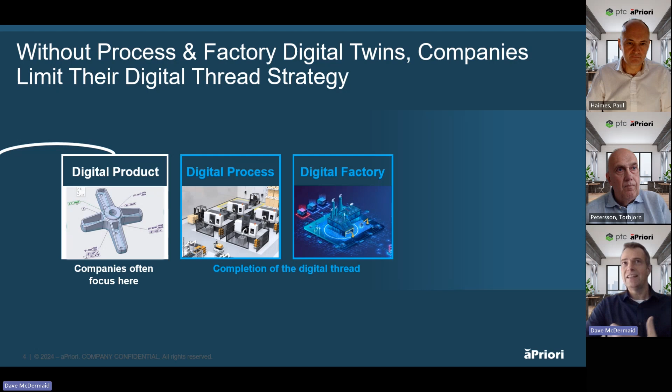We create a digital representation of the manufacturing process within a digital factory that allows us to draw out insights. Those insights form at many levels, down at the geometric level, the part level, the assembly BOM, or even the whole entire year's production run level. These insights can be used to support very important decisions in a world that is dynamic, changing, and over the past few years was really problematic for companies.

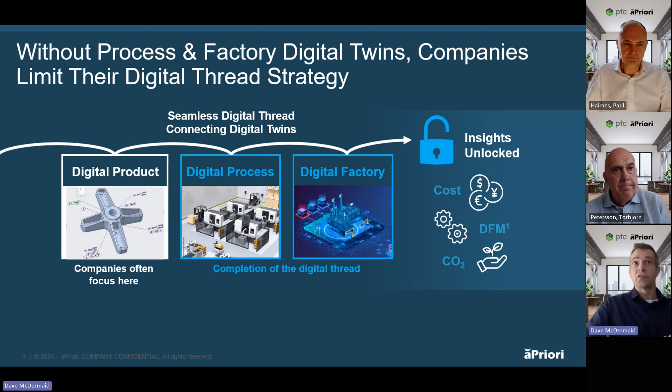Manufacturability has always been a problem, but in the last few years, manufacturability issues meant that we couldn't get material to make parts. And this all comes down to one of the most important things for companies, of course, which is cost. So combining manufacturability into the cost and today carbon footprint, we can help companies make decisions much earlier on in the product life cycle, support what they're trying to do, be profitable, sustainable businesses.

How does that fit in with the PTC product landscape? Well, most of you out there are using Windchill and Creo, so you will have a product definition that looks like this. We at aPriori provide a cloud platform that will take insights from Windchill, the CAD parts, the BOMs, assemblies. We take some basic production parameters like what they're made from and the types of components they are, and it allows us to run an analysis.

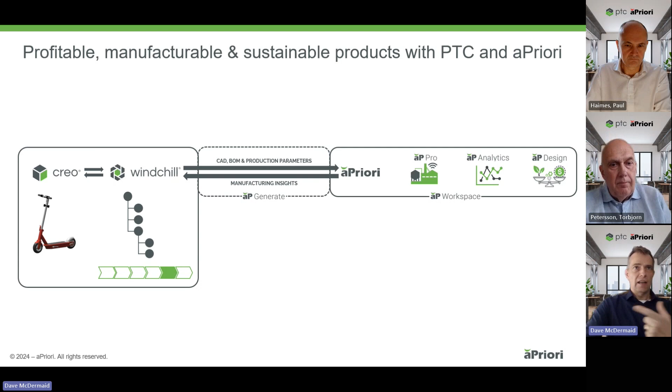And that analysis produces some manufacturing insights that we pass back to Windchill so we can populate the bill of material with cost information, sustainability, and manufacturability insights that tell people early on in the process how difficult things are to make. And that's really powerful in a stage gate process. At certain gates in the life cycle, this information becomes valuable to allow us to progress to the next gate with a design that's affordable, sustainable, and easy to manufacture.

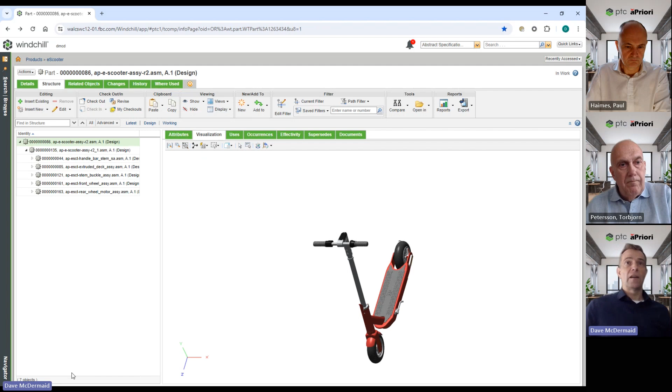So what does that look like inside Windchill? So here's my Windchill environment, here's my product, and inside my product, I'm still working on some of these components. This little part here is halfway through its design stages. It's not completely finished, yet aPriori has already provided me insight that goes back into Windchill, and this is it. This document here has a list of data that came from aPriori. At the top here is what aPriori read. This is a stock machine component made of this material here.

Immediately, it provides me with a rating and a score around manufacturability. It's looked at it and said, this isn't that easy to make, and it tells me that here. Supporting that is information about material utilization, the cost of the material, the cost of the final part, as well as sustainability information. This is the carbon footprint of that component in production.

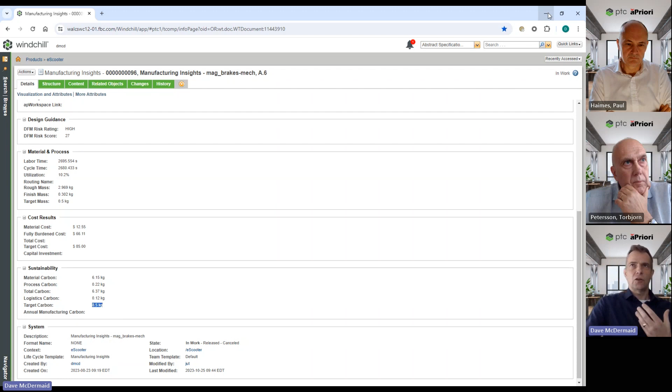These insights build up a picture of manufacturability and cost and carbon that allow me to decide whether this is ready to go into production or to progress to more detailed design, where I'm doing FEA and tolerance analysis and things that are going to consume engineering resource. I only want to do that on things that are ready and good.

So Windchill now has this greater level of information that can be rolled up. And these roll-ups can be done within the context of a product structure. So I can now create reports that show me how well I am doing against my targets for cost, carbon, and quite frankly, manufacturability as well.

These red circles represent high costs against the design progress. I'm only 3/4 of the way through, but I'm already nearly over my cost target. Some of the things behind that are manufacturability problems. And the job now is to go and find out where they are and why, and do something about them early in the life cycle.

So here's what we do. We create a more detailed evaluation of what's behind all this inside the aPriori world. And these interactive visual reports can support the design teams, among other people. For the design teams, they can go from Windchill. So let's go back to our Windchill page here. Here's our component. It's got a high score here. And here's a little URL, a link that takes me through to the actual component that's got a problem.

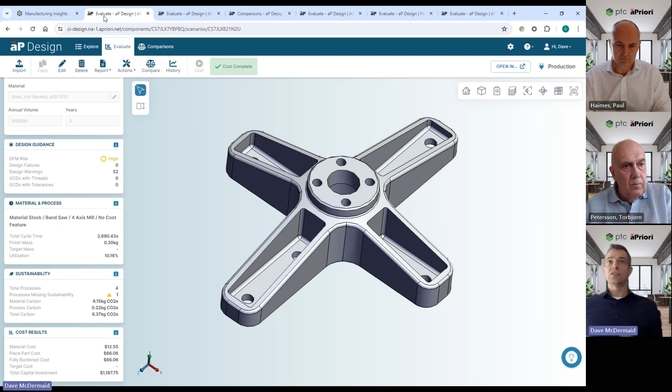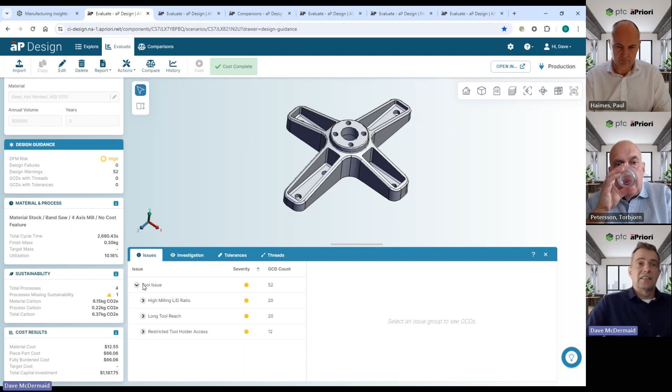So for design people, I can see what aPriori did when it ran its analysis. It, first of all, came up with a manufacturing process. This is a machine component, and it's suggesting 4-axis mill is the best thing to use to go and make that component. And it's got cost information as well. But for design people, this level of insight tells me that when it did the analysis, it found that it needed long tools to go and manufacture some of these surfaces and faces. And it's even suggesting what ratio of depth to diameter the tool needs to be.

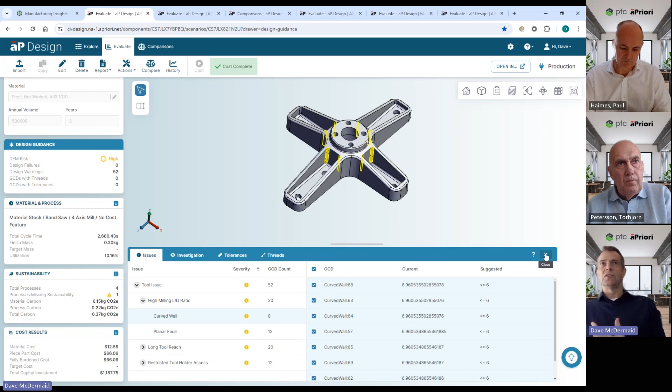In other words, I've designed in small, long fillets that aPriori is telling me is a problem. And here's some guidance to support design people on why that is a problem. I'll cover that in a minute. But basically, I get to see problems. And I can go about solving these problems immediately, coming up with a new design which has got much bigger fillets in here. They're easier to make with a bigger tool, reducing cycle time and therefore cost.

And then I can create comparisons of one design to the other. So at the left-hand side here, this is the design which was difficult to manufacture. This is my new design that's easier to manufacture. And again, my yardstick for manufacturability is cost. And down here, I can see a fully burdened cost that, if you look down this box here, is nearly 23% lower. That's fantastic. And I'm doing this way before I finalize the design. I'm already reducing cost and making it easier to make because I have these insights.

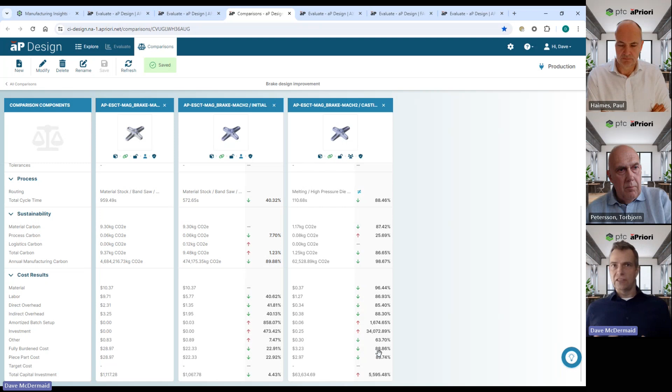Deeper insights also show me where I am wasting electricity, setups, materials, and resources that point to other manufacturing techniques like casting. So aPriori gives me indicators that say this could be cast. And if I designed it for casting in a slightly higher production volume, I can take another 90% out of the cost. So all these little insights point to ideas and concepts I should consider early in design. I take them on board and I make better products.

As I'm doing this for this plastic component here, aPriori is tracking a history of every design iteration I make. So I have a physical plot to show me where I am against my carbon or cost targets. And I can also plot this against DFM, design for manufacturability. So here I am maintaining manufacturability on this, making it easy to make and bringing down the costs at the same time.

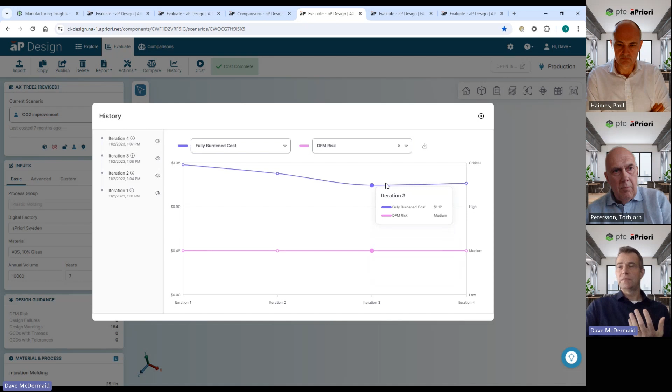Now, it's not just simple components like this. To aPriori, it's just mathematics. Some of our customers create analyses of very complicated components and bills of materials. It's just maths to aPriori. It crunches through all of this in the cloud to present information about not just one component, but every component in a bill of material. Each one of these has a manufacturability score at the left-hand side, cost information, carbon information. So I can build up a picture of a bill of material that goes back into Windchill where people can interact with it in the life cycle.

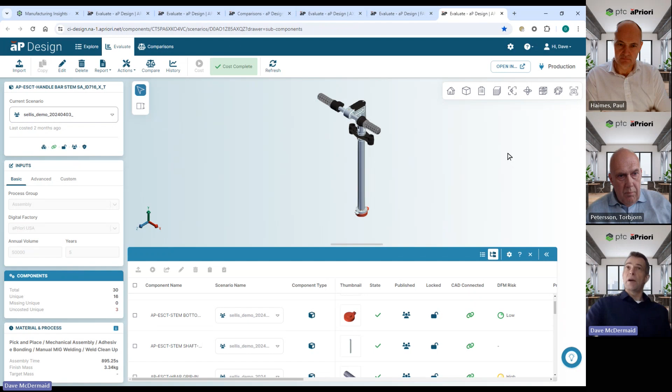Very powerful. It does, however, beg a question that if I have all these great insights, I can't go and look at absolutely everything. So the real focus now is, where do we find the best parts to focus on? Luckily, all these insights can be looked at multiple levels. So for example, I can take a series of components and plot them on a graph like this.

This is cost versus weight for machined components or cast or sheet metal with the same material type. And you see there's an average there, all these components about the same dollar per kilogram. This one here is higher. It's more expensive per kilogram than its peers. The size of the bubble represents the annual spend on that component if we went into volume production.

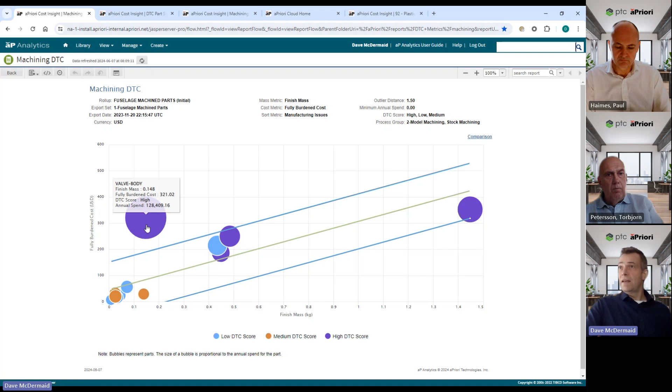Therefore, big bubbles are big cost problems. And the color of that bubble, purple means bad. It's a high score on the manufacturability table. It's got lots of manufacturability issues. So that is my first component I want to focus my engineers, my cost engineers, value engineers, manufacturing engineers, to support the design teams to say, let's make an impact on this before we commit to final production.

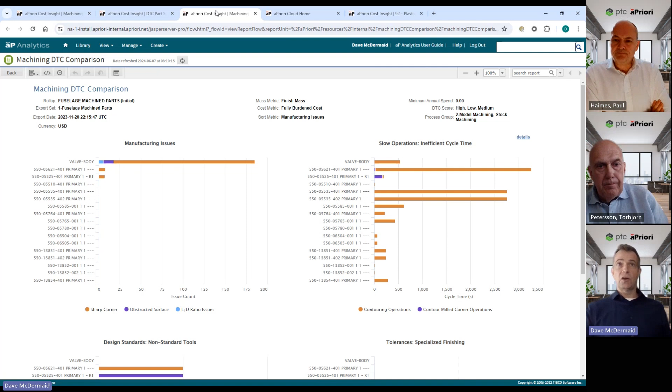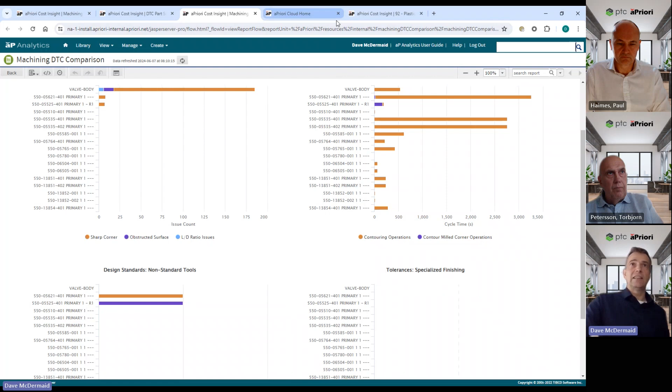And for that component, we can see what it is, its high score, some of the attributes, and we can dive into that visual report to find out more. Or we can look across a broader spectrum of components that's on that table and look at all the manufacturability issues, see which ones are standing out. So in aerospace, for example, a lot of components require complicated surfaces that need to be machined in a contouring operation. It's expensive. When we start to see lots of these, we could possibly educate the design teams on things they should consider or things they could possibly avoid.

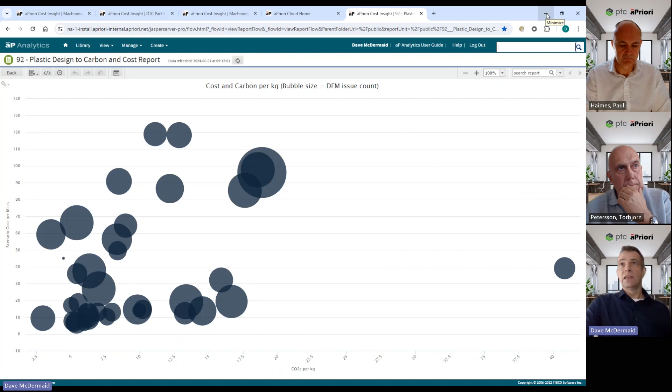What I'm looking for in this graph is anything around the periphery. This component over here is a CO2 problem. These components up here are cost problems. If I use carbon and cost as my measures for looking for issues, I know where to begin looking for manufacturability issues, real ones that are impacting these factors. So the analytics can be elevated to a broader spectrum, filtered by product, production run, or even everything that we do, to allow me to find the things that I need to focus on as a business.

And then what we'd really like to do is analyze this on demand. I find components that are problems, and I would like to be able to, directly from my CAD tool, get instant insight from them. So this is another component in that e-scooter there, a small bracket, an insignificant component. If I look down here, it costs $6, a cheap bracket. Now, if we go into extremely high volume production, then that starts to become expensive.

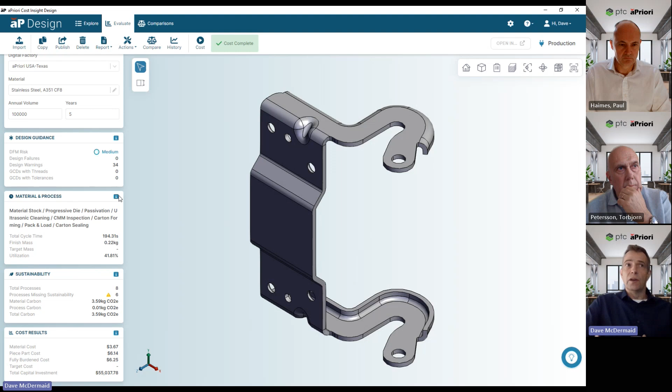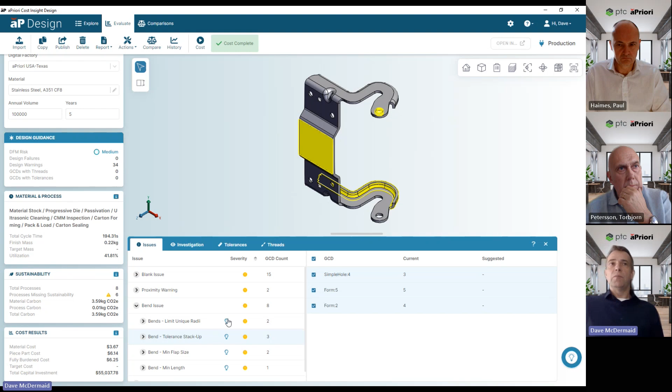So on this component, if I look at the manufacturability issues on it, there are things that are driving potential yield issues, cycle time issues. Like, for example, if I have holes that are countersunk or bends that are problems, then it can introduce complex tooling. I have here a tolerance stack up, a classic problem that we see in components. And aPriori says, well, there are going to be more than one bend to create some of these features. And here's some guidance for design people that they should think about when trying to avoid it.

aPriori is not going to do the analysis on tolerance stack up. It's telling us that if I continue down this design path, this is another engineering problem I'm going to have to solve. This is another potential production yield issue that will cost us money at the end of the day.

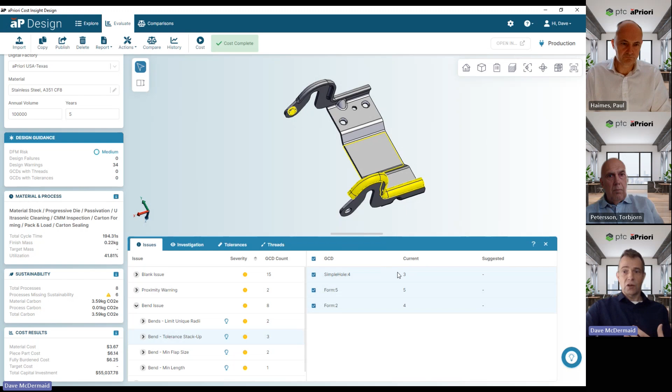The interesting one on this is that we have, out of all the other different issues, a low utilization of material. So aPriori said that for this production process, optimal is progressive die to go and make this. It's suggesting that the utilization is lower than it should be for progressive die. How low? Well, actually, aPriori can show me that. If I look at the manufacturing process itself, progressive die in terms of cost is the hardest one. This is the largest one.

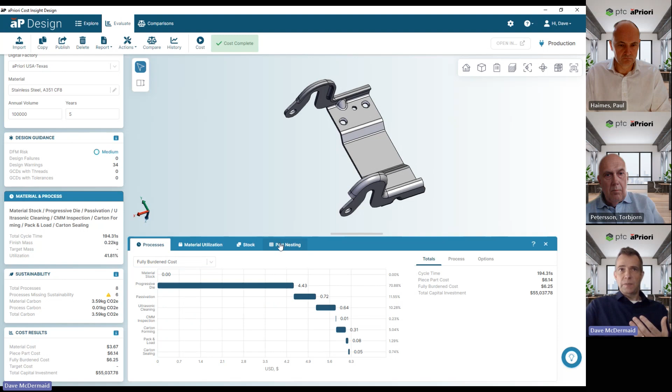And that's because we're nesting this component in a metal strip. And this is how it needs to be nested based on the flat pattern design that aPriori has analyzed in its digital factory. The dark blue represents wasted material. That's scrap material. So lots of dark blue is a problem. So design people could see this and start to think about how they're going to solve that problem. How do we do that with aPriori?

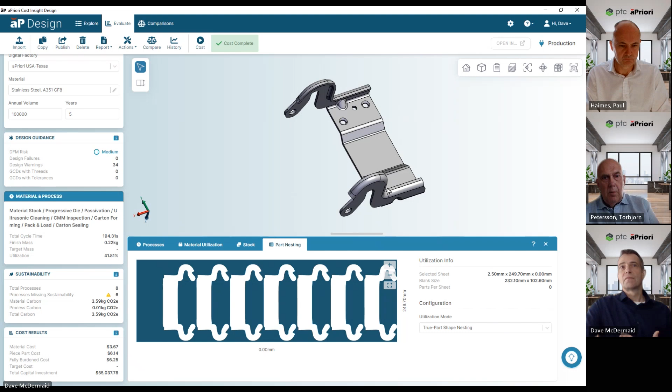Well, I go back to my CAD tool. In this case, it's Creo. I make a change to my design. And believe it or not, to make this component cheaper, I'm actually going to make it bigger. So I increase the size of my component, which sounds counterintuitive for a lot of design people. And then I send it back off to aPriori to go and do an analysis.

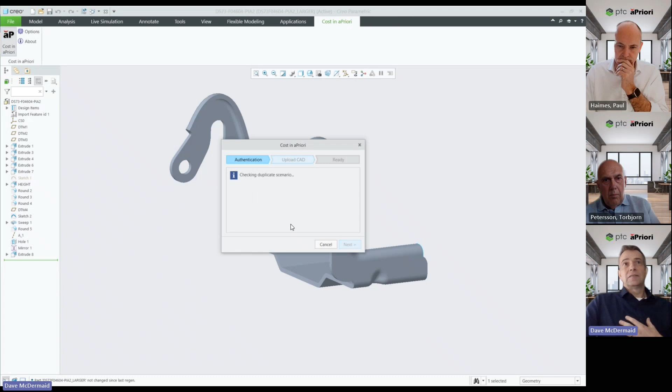And what happens here is that it sends the CAD data directly from Creo up to aPriori's cloud platform. It then goes through a series of little processes to be analyzed and got ready for analysis. It produces a series of internal reports. It does thousands, sometimes millions of number crunches up in the cloud.

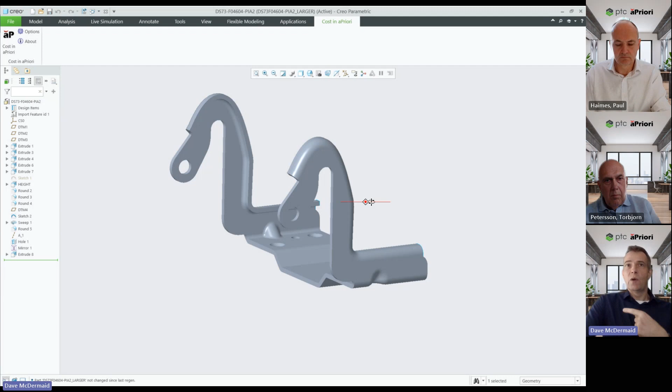And while it's doing that, we just carry on doing what design people do. We go about designing, we go and work on our drawings, we do these things. Meanwhile, aPriori, as you can see up here at the top, is doing some number crunching in the cloud.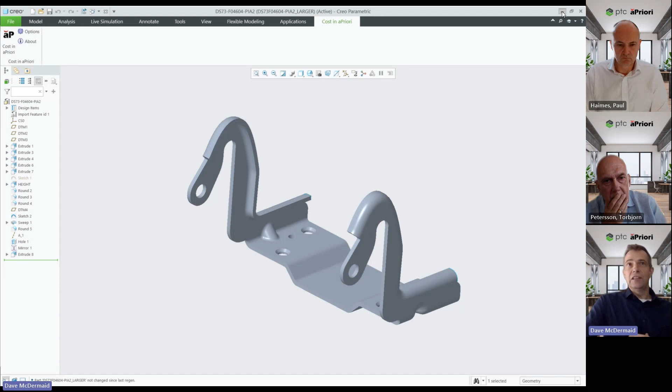What it actually does is take every feature of that CAD model. Let me show you again. This CAD model has bends, forms, punches that are defined in any way inside the CAD tool, but it looks for these features as manufacturing features. And for each one, it does an analysis of how it's going to go and make it.

And it builds up a picture from flat pattern to final part of every feature that needs to be created, so it can calculate the cost of the tooling, the components that go into the tool, the cycle time for each clunk of that machine, and how much material is going to be scrapped in doing so.

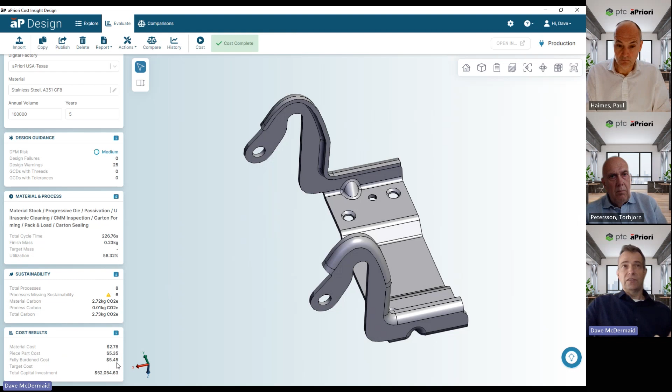If I look down the bottom here, we are bringing the cost down to $5.45. It's come down. Why is that? Well, if I look at the way in which it's nested in its strip, it's much better, isn't it? Now, that's a counterintuitive design decision. In fact, what would happen in the real world is we would make it smaller and actually impact the cost negatively. How do we know if we've done well?

We can run these comparisons that compare the original design to the new design. And if I scroll down here, you'll see in my comparison that I've got a considerably lower cost. Down the bottom here, fully burdened cost down 13%, or about 85 cents rather.

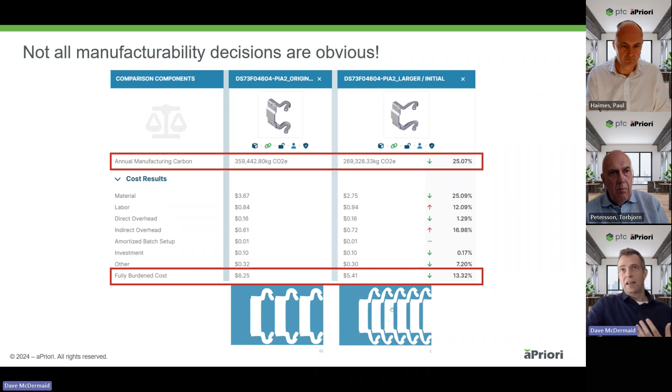That for a 100,000 components a year product over 5 years is about $420,000 for a tiny little component like that. So imagine what it would be if it was a larger component or a larger set of components. And all these little analyses of manufacturability make small impacts on every component, sometimes big ones like this, that allow us to make things easier to make and bring down cost.

So that's great for design teams, but there's a broader enterprise in most companies, and these insights support everybody. Procurement, for example. Now, procurement, they want to negotiate fair market price for components and low CO2 and low cost supply chains at low risk in political zones that are not susceptible to turmoil. That's what they want to do.

When it comes to manufacturability, we have several customers who will stand up and publicly say they are paying money because the suppliers are their manufacturability guides. They use their suppliers to help them design for manufacturability. Their suppliers charge them for that. They don't know it. It's in the price of the components. These suppliers also get a little bit tired of having to and fro between the design teams.

So aPriori provides insights to design to support procurement because they go to procurement with designs that are ready to be made, but also it gives them insights to allow them to make really powerful decisions. This is a graph here that shows me, for everything that I'm manufacturing a year, the complete material requirement, including the material I'm going to scrap, not just the weight of the parts, but all the material I'm going to use.

This red bar represents my highest volume material. This is a grade of aluminium, which if the price of that material starts to rise, or that material becomes unavailable because of supply chain disruption, my manufacturability drops to zero, or goes to infinity rather, because I can't even get the parts. From a cost perspective, that's the one we're most exposed to if that material grade goes up.

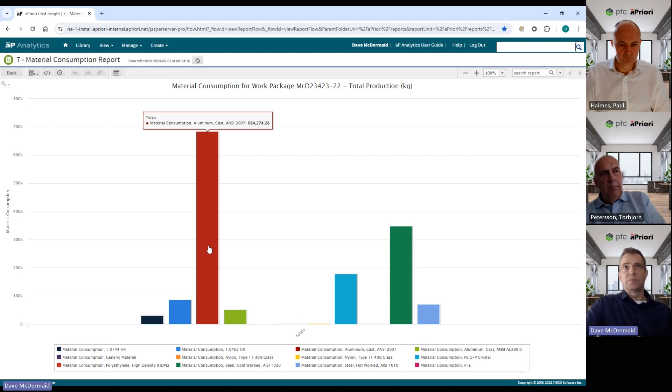So we can think about spreading the risk of cost by looking at making designs of a variety of materials, or focusing on a single material where we can get higher volumes and therefore lower purchase price based on volume. So for procurement people, these insights can help them around manufacturability and ultimately cost of procurement.

Plant managers, well, they're thinking about manufacturability with respect to something very special, which is their actual facility. And in their actual facility, when they're making things, they have a finite number of machines of certain types. The analysis that aPriori does tells us what machines are ideal for making each component and component type. So we get data that supports capacity planning for manufacture.

And where we start to see an increase in requirements for, say, 5-axis machining or vertical casting, we can start to see where there's going to be a problem in supporting our production facilities so they're not overrun and we have to go to the supply chain. So manufacturability for the shop floor means, can I actually make it, or do I have to outsource it at great cost?

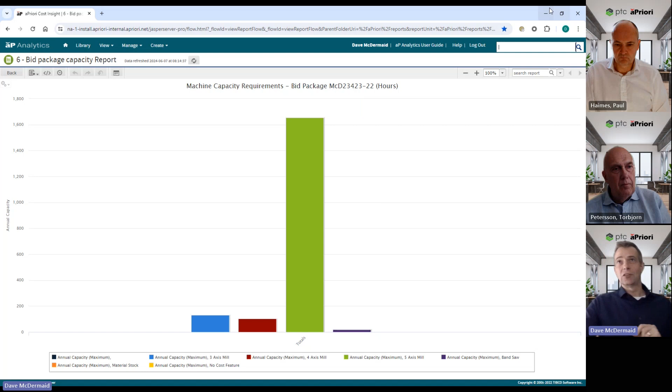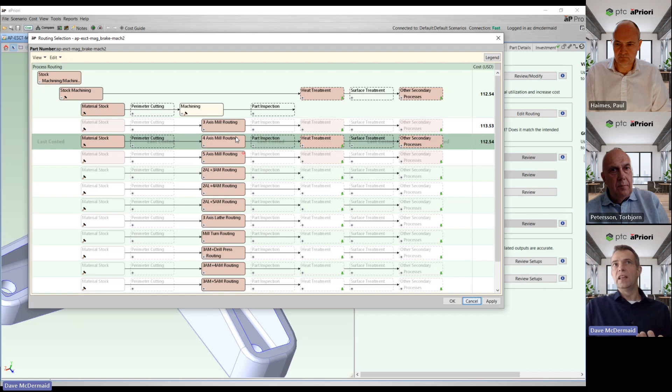In fact, they get a greater level of insight. This is that same component from earlier on, but this time for cost engineers, for example, they can see what the optimum routing was for this component, 4-axis mill. This could be turned, but let's say we have a production facility or a supplier that have lots of milling capacity. So that's the analysis done against somebody's actual capability. And then the manufacturability guidance is based on that capability.

For a design person, this looks like a nice, easy shape to make. Is it? Well, here's a list of design features or surfaces that are driving cycle time. And right at the bottom of the list here is the heaviest one. To make this surface requires a contouring operation. That's why it's on this list.

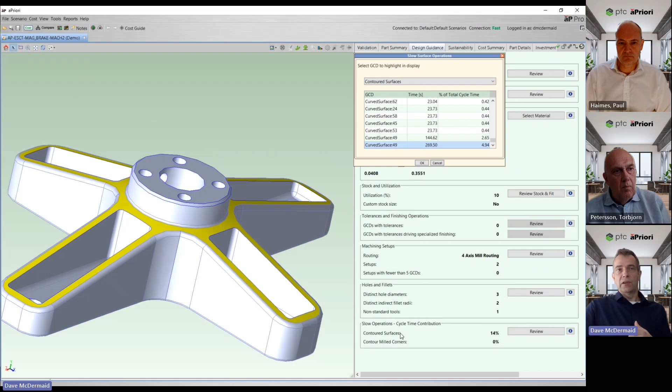And it doesn't look like much to the average design person, but yes, you can see at the top there where I've got a planar surface meeting this curve here, it's going to form a domed surface. That cannot be machined with a flat cutter easily. So I have to use a contouring operation that drives cost.

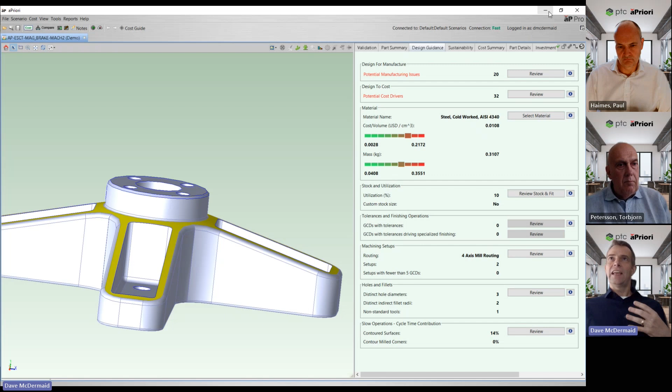So with the expertise of manufacturing people, they can get to see that and they can offer their suggestions and comments back to the rest of their organization and ultimately back to Windchill, where they can take this analysis that was done in this component and produce little reports and markups inside this workspace to say, as a manufacturing engineer, I would like you to consider this, Mr. Design Person, Mrs. Design Person, because if you can, it saves us $500,000. Any chance you can go and have a look at that?

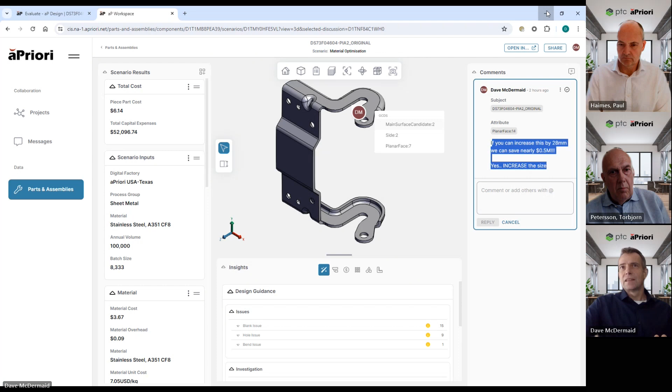So the whole organization can think about manufacturability, can collaborate on manufacturability with insights that are provided much earlier on in the process. And that's how at aPriori we're helping organizations make it a reality and avoid some of the problems of the world, especially around the cost pressures that they've got to address. Okay, so I'll stop there and we can open up for Q&A.

Torbjörn? Yes, sure. And thanks a lot for sharing a lot of cool stuff here and the cool demos here, Dave. And actually, first question will go to you, Paul. So, Paul, we have heard a lot of great things from aPriori here on their offerings and how they positively impact the manufacturability of a component. So can you please comment on how the digital thread provides scope for impact across the product lifecycle?

Yeah, thanks, Torbjörn. Great question. And thanks, Dave, for a really interesting look at aPriori and the technologies there. And I think when we look at what is possible within the context of the full digital thread, including manufacturing, engineering, and service, beyond what we've seen from Dave today, there's other areas that, of course, we can have an impact on manufacturability. So, for example, multi-bill of material management. So the ability for us to help companies with initiatives that are sometimes described as manufactured as designed.